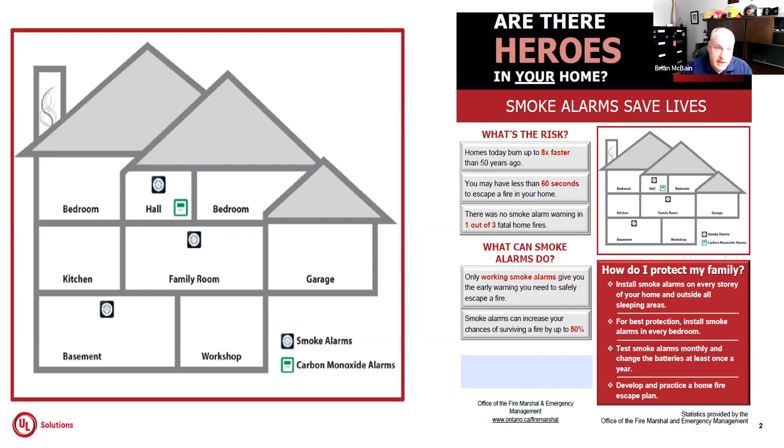So some information, for example, from the OFM, which is a great resource. NFPA also has some great resource material. This year I chose from OFM. So just to give a little bit about the risks, smoke alarms, great material to provide to the homeowner, a nice little visual of where your smoke alarms are supposed to be and your carbon monoxide alarms. Looking at that, this is the minimum code requirement, which is 1 per floor, and then outside the sleeping rooms. So I'll discuss a little bit about that, and then some of those building code requirements as of today.

So like I said, I'm going to talk about the building code. I'm going to try to go back into history to the first building code. I had researched some information. I don't have copies of the old codes, but from what I could find in archives and so forth, we'll discuss some of the fire code requirements. I'll look at some of the changes to the smoke alarm standard as technology changes, smoke alarm changes. I'm sure we've all noticed that in the smoke alarms. I'll speak a little bit about the ULC installation standards and the ULC maintenance standards, and then some other resources that are available to public educators and fire prevention officers.

I'm not really going to touch on carbon monoxide alarms. As UL, I can't speak to carbon monoxide alarms because they're tested to a CSA standard. So if you ever want information on the CO standard, we would have to contact CSA to provide a presentation on that. So like I said, I'm just going to touch on smoke alarms.

Okay. So we should all have access to the chat. What I would like to see in the chat is: if I built a brand new house today and I pulled a permit, tell me where I would have to install smoke alarms. So just take 30 seconds, put into the chat where all my smoke alarms would have to go in the house, and then I'll start going through and explaining that. So hopefully the chat will start populating a little bit.

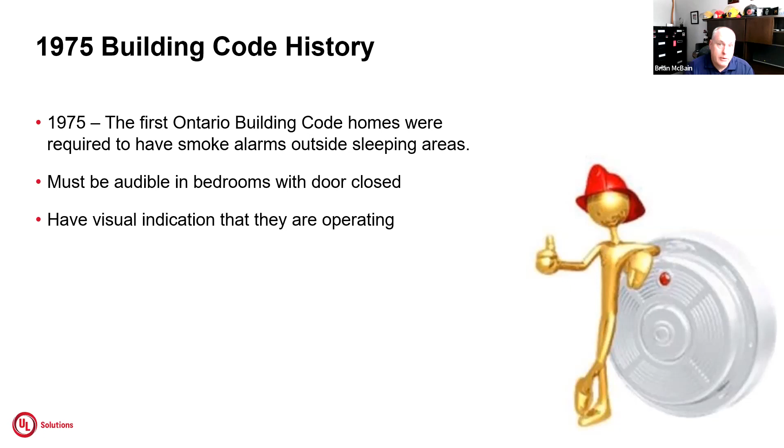Okay, so let's go back to the building code. Our first building code in Ontario was around 1975. At that time, homes had to have smoke alarms outside their sleeping area. The requirement was you had to hear it if the door was closed, and it had to have a visual indication that it was operating. So pretty base requirements. The visual indication would be the little red light on the alarm, or the green light saying that it's on, so it could be the red or the green light.

Then in 1979, they amended Part 3, not Part 9. They said you had to have a single station alarm installed in every dwelling unit of an apartment building, between the sleeping areas and the rest of the unit, on the ceiling or the wall; if on the wall, 6 to 12 inches down. And it had to have a permanent connection to an electrical circuit. They didn't touch Part 9 in 1979.

Then in 1983, they made changes to Part 3. All those previous requirements stayed, and they added more. They said the smoke alarm has to comply with the ULC standard. That was the first time they introduced the standard, a 1978 standard. When they made the changes in 79, the standard had just come out, maybe they were waiting for certified products. I don't know why they didn't go in 79, but it kicked in with the 83 building code.

If you had sleeping areas served by hallways, smoke alarms shall be installed in the hallways. Before, they weren't saying shall be. Installed on the ceiling in conformance with the acceptable instructions. Remember I was talking about the 6 to 12 inches; Part 3 said you had to follow the manufacturer's installation instructions. And in 83, interconnection was required, so if you had more than one, they had to be interconnected.

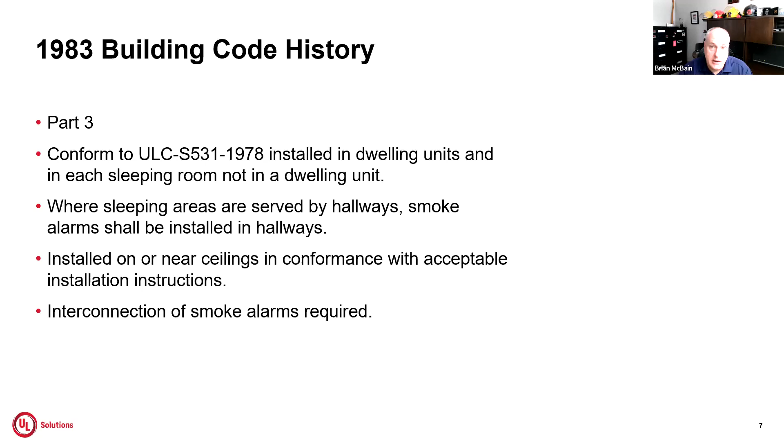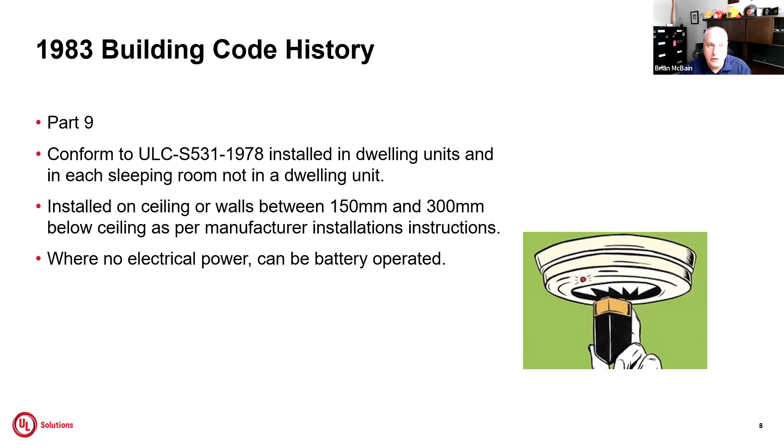In 83 also, part 9, they referred to the 531 standard, 1978, just like part 3 said. And then it said installed on ceilings or on the walls 150 millimeters to 300 millimeters. Well, remember before it was 6 to 12 inches. Now it's millimeters because metric came into effect, so the code had to change and add the metric requirements. So they stopped talking about inches and changed it to metric, and it had to be installed in accordance with the manufacturer's instructions. And in part 9, they permitted, if you didn't have electrical power, you could use battery operated.

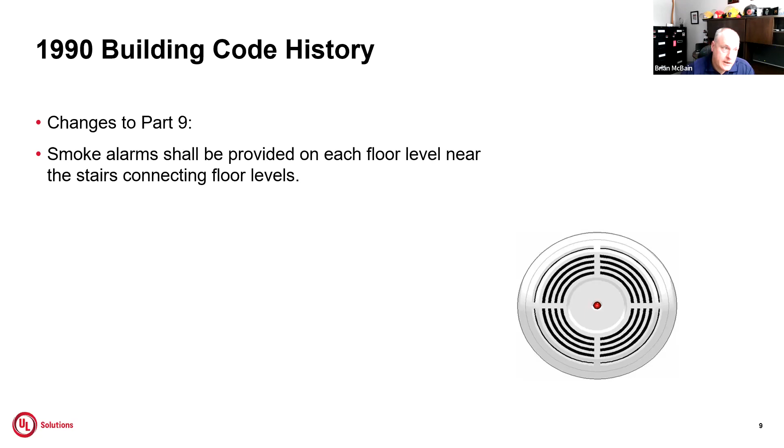In 1990, the building code made some additions to part 9: a smoke alarm shall be provided on each floor level near the stairs connecting the floor levels. So they said floor levels. Okay, so on every floor level, however the building code defined a floor level, is where you had to have a smoke alarm installed. Okay, so that was 1990.

So let's jump into the 1997 building code. 1997 kicks in and said, okay, for part 9, you need at least one smoke alarm on each floor level, including the basement. So I'm coming to the conclusion that between 1990 and 1997, maybe there was some confusion. Do I need them in the basement or not? Is the basement considered a floor level or not? So they clarified to say including basements. So if it's defined as a basement as per the building code, then you had to have one there also. That would be considered one of the levels.

Each bedroom is protected either inside or, if it's outside, within 5 meters of the bedroom door. The distance from any point on that floor level could not exceed 15 meters, okay? And a manually operated device is permitted within the circuitry of the smoke alarm to silence the signal. So the code introduced in 1997 the hush button feature. So if that came into the code, then the ULC standard had to get modified to include that requirement. So it just shows you sometimes the requirements are specific in the code, which then product standards have to get adjusted and updated and then tested to be in compliance with the code.

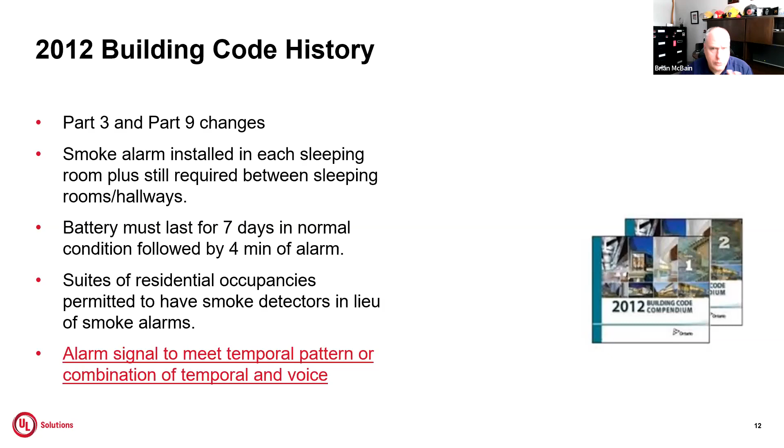You should not be able to buy any more of the beep, beep, beeps. There may be some that are still available, but at some point that'll be all done. And I think June 2024 will be the end of all that, and it'll be only temporal going forward, and with that battery backup. So don't quote me on that, but I think it's June 2024.

Also, with the 2012 building code in Ontario, in January of 2015, we had the part 3 and part 9, where in Ontario, smoke alarms have to have that visual signaling component. Not going to get into too many details on that. There were controversial items about it, because from my understanding, when the code first came out, there was no combination product. The code didn't say you had to have a combination unit, it just said you had to have a strobe.

So in the initial days of the implementation of the building code under permits, there could have been a smoke alarm wired over to a strobe light in every bedroom and in the house. And then eventually at some point, the combination units got onto the market, I don't know how many months later. And then you started seeing those combinations instead of a traditional smoke alarm tied over to a strobe. Okay, so that's the change, and now we basically see just the strobe light. Yes, they're quite a bit more expensive versus the traditional smoke alarm, but this is an Ontario-only requirement. There's no other province that has the strobe requirement as of yet.

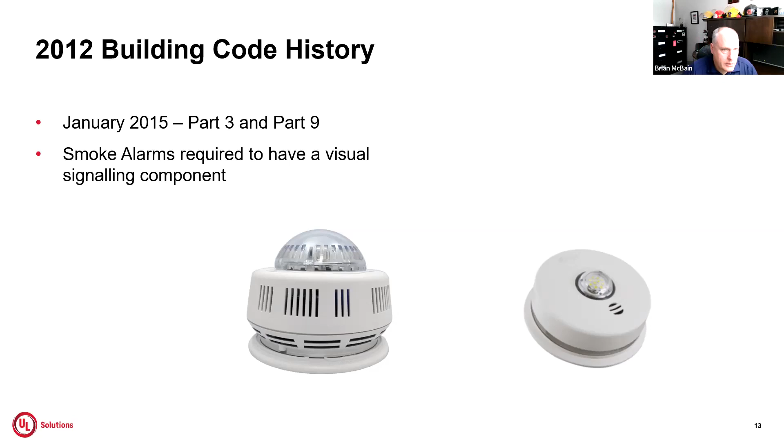I am a voting member on the National Fire Code, and there's been discussions at the national level to make it across Canada, but no decision or deliberations have been done as of yet for that. Okay, so a little history about the building codes. Why did I spend all this time explaining the building code?

Because as we go through the fire code, we will see that, I'm just summarizing here, if you're replacing a smoke alarm, it has to be in accordance with the building code of the day and meet the requirements. So if the building code of the day only required you to have one smoke alarm, which we know is not correct because the fire code says you need one on every level, then you would not have to go with a strobe light. You only have to meet the requirement of the day.

So we know we need one on every level. So, you know, there should be no house with just one smoke alarm. Now, what about the battery backup versus not the battery backup, right? So as we're looking at those requirements, you would have to put it back in as the day of the code, okay? So let's look at what the requirements of the fire code are.

So if we start with section 2.1 of the code, basically Part 2 does not apply to individual dwelling units except for sentences 2 and 3. So anything in the fire code does not apply to a dwelling unit, but let's go to what the exceptions are for sentence 2. I didn't pull out 3, I just pulled out 2.

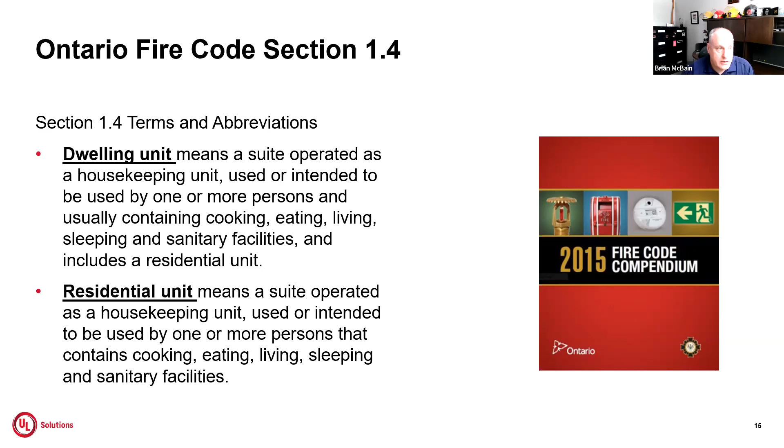So it's a suite that's operated as a housekeeping unit used or intended to be used by one or more persons that contains cooking. The other one, dwelling unit, says usually containing cooking. Residential unit says contains cooking, eating, living, sleeping, and sanitary. Okay, so just a couple of little definitions.

So let's get into section 2.13, because Part 2 said 2.13 applies to dwelling units. Okay, so let's look at the application for the installation of smoke alarms. So section 2.13 applies to suites of a residential occupancy and sleeping rooms not within a dwelling unit.

Okay, 2.13 does not apply to buildings that are subject to Part 9 and does not apply if smoke alarms have been installed in a dwelling unit or the sleeping room not within a dwelling unit in accordance with the building code as it read on or after April 6, 1998.

Remember when I was talking about the building code requirements in 1997, that's when it kicked in for a smoke alarm on every level or every story, okay? So that's why they're saying if you met those requirements of the building code since 1997, then this section would not apply, because this is for installation of smoke alarms, okay?

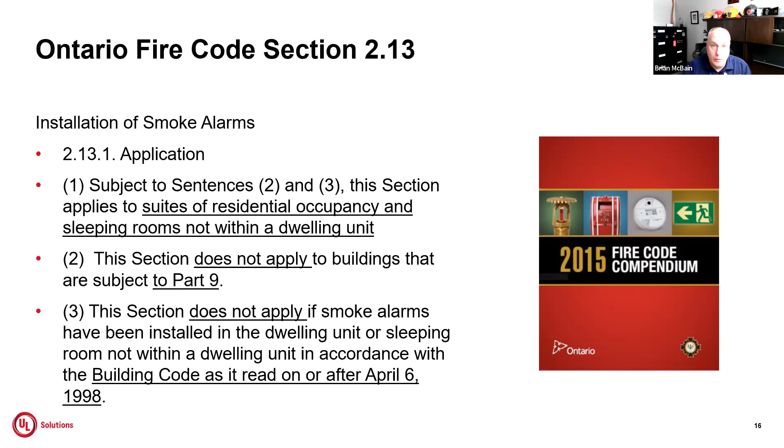So now what I'm going to do is start breaking up the requirement on where a smoke alarm shall be installed, okay? So a smoke alarm has to be installed, if the sleeping area in a dwelling unit is served by a hallway, in the hallway. So you have to install it in the hallway. So remember, this is the minimum code requirement.

Now let's look at B. So the next item under 2.13.2.1 says that the smoke alarm will be installed, if the sleeping area in a dwelling unit is not served by a hallway, between the sleeping area and the remainder of the dwelling unit. So I just found a random picture on the internet.

So if we have this type of dwelling unit, where could we install the smoke alarm? Because it has to be between the sleeping area and the remainder of the dwelling unit. There's no hallway or anything for this bedroom here. We can see the bedroom is right here. So you could potentially maybe put your smoke alarm here. I apologize, I'm looking at a different screen here.

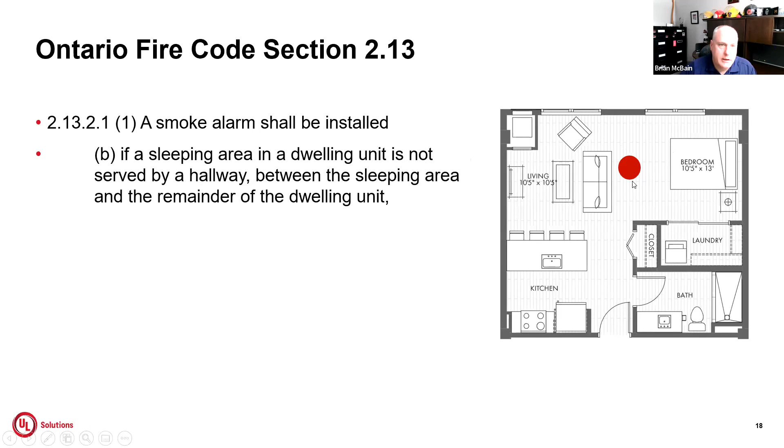All right. The smoke alarm has to be, if a sleeping room is not within a dwelling unit, in the sleeping room. So for those particular cases, if Part 9 doesn't apply for rooming, boarding, lodging for more than 4 or 10, whatever those numbers are, it's possible you might have sleeping rooms that are not in a dwelling unit. So you have to put them in the sleeping room.

So again, maybe not the best picture in the world, but just to give you an idea, this is not a dwelling unit, for example. It may be, but I'm saying it's not a dwelling unit. So then you would have to be putting the smoke alarms inside of each bedroom. So you would see them in this bedroom, this bedroom and this bedroom. So it's not a dwelling unit, so you need them inside the sleeping room.

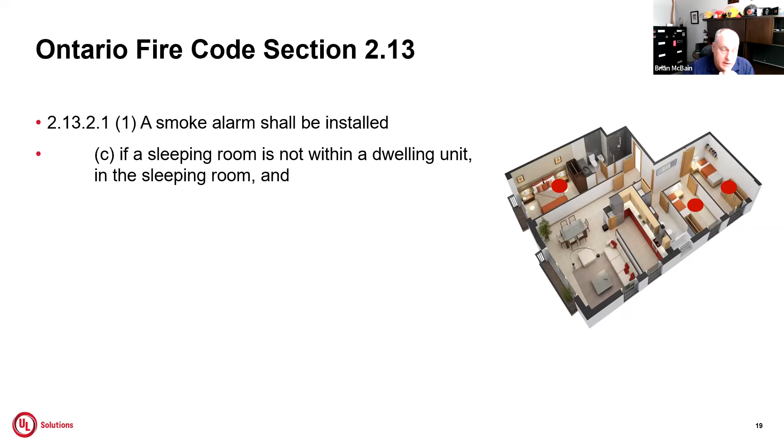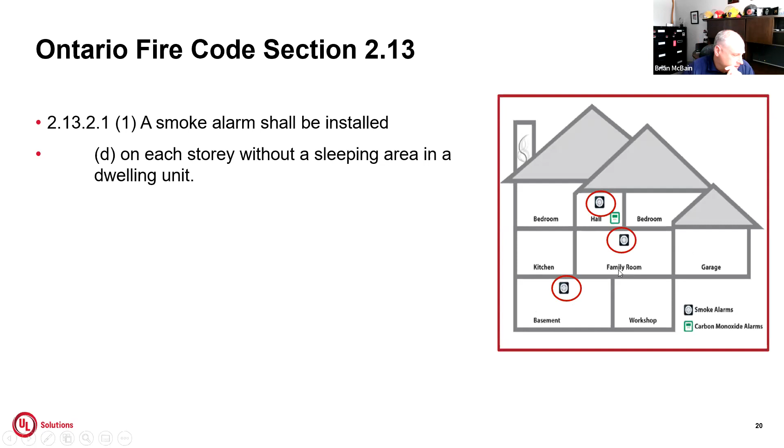The last requirement here is a smoke alarm shall be installed on each story without a sleeping area in a dwelling unit. So again, let's come back to this picture of the house. You need them on each story. Okay, so they're on every level, each story, you have a smoke alarm. So you can see here, the first floor doesn't have any sleeping rooms, so you need it, and there's no sleeping rooms in the basement, so you need the smoke alarms. All right.

Some other items in 2.13, a smoke alarm has to be permanently connected to an electric circuit with no disconnect switch between the overcurrent device and the smoke alarm. So there's no switch that can turn off the smoke alarm, it can only be turned off by a breaker. Or it can be battery operated. So the fire code has to give us those two options, because if there's buildings without power, a dwelling unit could be a cottage potentially, then you can go with battery operated.

Or if you had to add smoke alarms in a dwelling unit, you could go with battery operated. And then it says that a smoke alarm shall comply with ULC S531. So that's where you would see the ULC listed on the smoke alarm, or the cUL listed, or the ETL listed. CSA does not test smoke alarms, they test carbon monoxide alarms. So you wouldn't see a CSA logo by itself on a smoke alarm.

You may see a ULC and a CSA on the same device, or ETL and the CSA. Because of the carbon monoxide, if it was a combination, you could have both logos on it. Or a combination unit could have just one, and it was tested to both requirements. I'll get into that a little later.

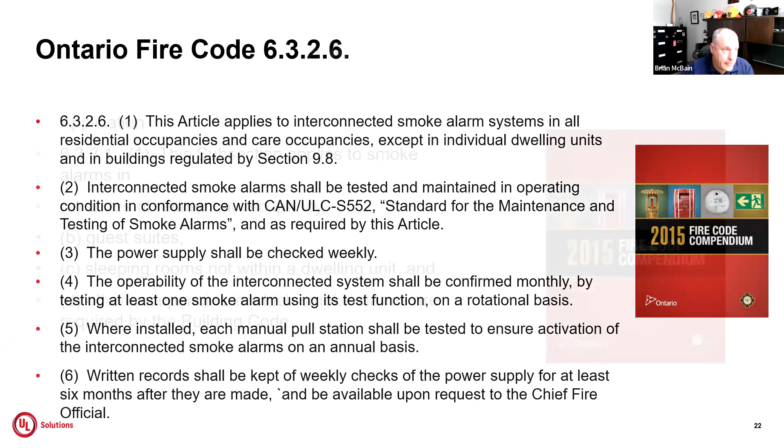Now we're going to jump into Part 6. So we were just going into more detail on 2.13, and we touched a little bit on 6.2 for interconnected smoke alarm systems. Now we will get into 6.3.3.1 or 6.3.3, which is smoke alarms. So obviously start with the application. So this is for residential occupancies, guest suites, sleeping rooms not within a dwelling unit, and any other occupancy in which smoke alarms are required by the building code. So that's the application for 6.3.

As we look at 6.3, numerous requirements, but I highlighted what those requirements are. Okay, so 6.3.2 is that the landlord is considered the owner for a rental suite. So we know at the beginning of the building code, I think in Division A 1.4 or something, it says that the owner is responsible for the code, but for these particular requirements for a rental suite, it's only the landlord that is considered the owner for applying the requirements. Okay, so when it comes to the owner shall be responsible, it will be the landlord. Okay.

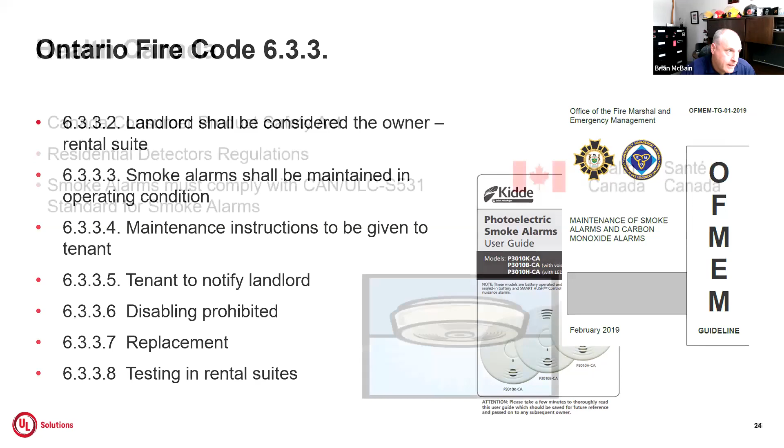Okay, so I just finished speaking about the building code and fire code. Smoke alarms have to be compliant with 531, installed in accordance with 553, and maintained in accordance with 552, and so forth. So the building code and fire code say smoke alarms have to conform to 531. If we look at the electrical code, it says the same thing, that smoke alarms have to comply with 531.

The smoke alarms require certification, because anything electrical that's 120 has to be certified. Whereas for the building codes and fire codes, we don't say it has to be certified, it just has to conform to the standard. But we look for the certification mark, because how else are we supposed to know that that smoke alarm is compliant with 531? Would we accept a letter from a manufacturer saying there's no ULC, no ETL, no CSA, no nothing, but I'll write it on a piece of paper or an email that it complies with 531?

So 531 is, I think, a 200-page document for testing of smoke alarms and the construction of smoke alarms. We as inspectors typically would prefer to see the listed mark on it. But the electrical code requires the smoke alarm to be listed, so that kind of trumps it all. However, the electrical code does not speak about a 9-volt battery, only the hardwired ones.

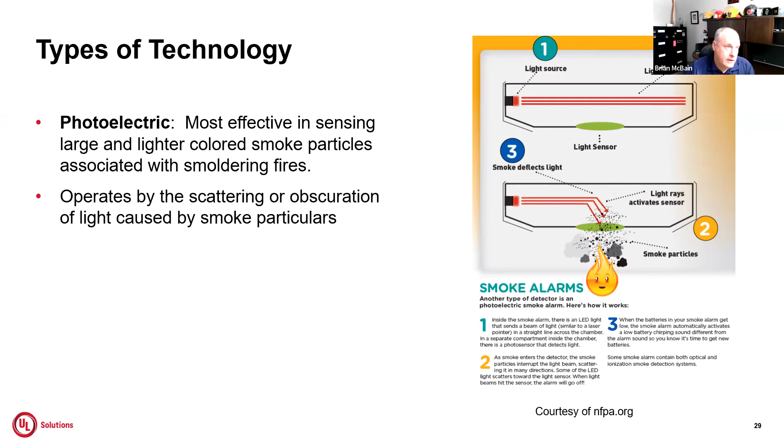The standard also speaks about a multi-criteria smoke alarm. As technology is moving forward, the standards have changed. Smoke alarms are getting intelligent, and they're starting to put the technology and the sensors inside these smoke alarms to help reduce nuisance alarms. So basically this multi-criteria alarm has the smoke sensor plus one or more additional sensors. It could be a heat sensor, could be radiant energy, could be fire gases or smoke that operate together.

So what happens is each sensor is set at a level to measure the presence of the product that it's monitoring, and it gets the signal. There's a mathematical equation going on in that technology, and it's determining the amount of smoke within the device. And if those sensors together have come up with the criteria that there's enough smoke, then it sends the alarm signal. So it would not generate an alarm if there was not enough smoke. This technology is being used now to help reduce false alarms. That's called multi-criteria technology, and it would be written on the label on the back if it was a multi-criteria smoke alarm.

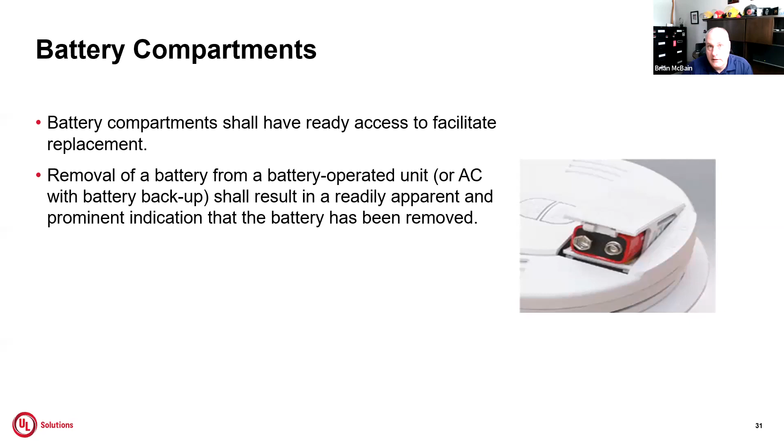Some things to understand about the markings. On the back of the smoke alarm, it'll tell you that it's certified and it has all the instructions in English and French. And it also speaks to the date of manufacture. So on that back side of that device, the date of manufacture has to be there.

However, in the 2002 edition of the standard, the committee said that you have to have an expiry date on the outside of the smoke alarm. So it could say replace by whatever date. So you have to readily see from the outside when the smoke alarm has to be replaced. If you do not have that replace by on the outside, either it fell off, which it shouldn't, or... as of 2004 was our effective date.

So remember I said once a standard is published, the certification companies have to review all the files of all the manufacturers and decide on what's the drop date that everything has to comply with. So for ULC, we said, I think it was June of 2004, that all smoke alarms will have to have this replace by on the outside.

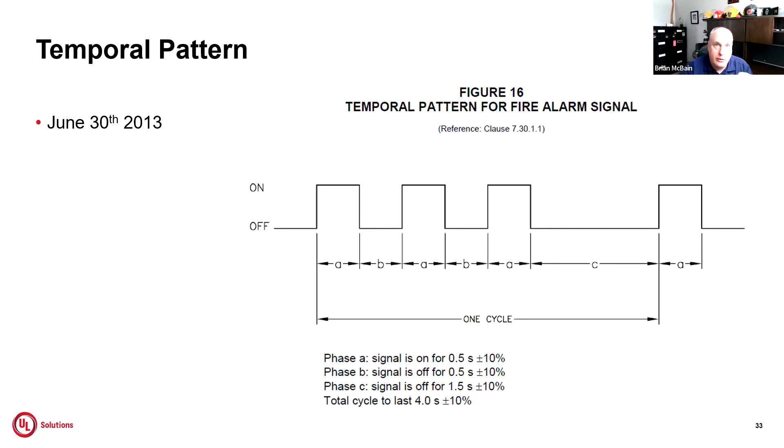I briefly talked about an end of life signal. The 2014 edition introduced this end of life signal into the standard. I just pulled a few things out of the standard: the smoke alarm shall indicate the end of life based on the manufacturer's lifetime, not to exceed 10 years. So the manufacturer could make it 9 years, 8 years, 7 years, hence the reason why the fire code says as per the manufacturer. So it's important to verify through the manufacturer's installation manual what those replacement dates are.

The end of life signal shall not be able to reset after 30 days. So you can keep pressing reset, but it cannot go past 30 days. I took a snippet from Kidde's website, for example. How do I determine if my end of life has been reached? They say if the alarm emits a chirp every 30 seconds, it's either the end of life or a sensor error. If the alarm emits a chirp every 60 seconds, it indicates the battery power is not sufficient to power the unit. An end of life or sensor error will not respond to a battery change.

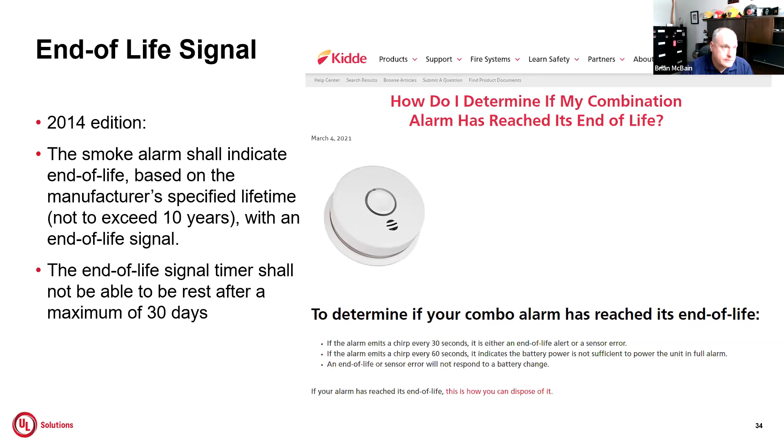All right. 553, this is the installation of smoke alarms. So the Ontario Fire Code is referencing the 2002 edition. Our current edition is the 2014 edition. The Ontario Building Code as of today refers to the 2014 edition for the installation of smoke alarms.

Okay. Some of the things that it requires versus the old one is a smoke alarm installation and verification report has to be kept on site. If you're doing an interconnected smoke alarm system, you need to do a verification report. And I'm talking about an interconnected smoke alarm system as defined by the code, not an interconnected one in your house. You don't need to do a verification report there, but for those occupancies that need that interconnection as per the fire code, you do. And again, always refer to the manufacturer's installation instructions.

Within that 553 standard, the 2014 edition, there's actually a report in the back in Appendix C that you can use, very similar to the 536 fire alarm inspection report, the 561 annual report for monitoring systems, 537 verification. So there's a sample document that the installers can use for that interconnected alarm system for those occupancies. Okay. It has to be kept with the building owner.

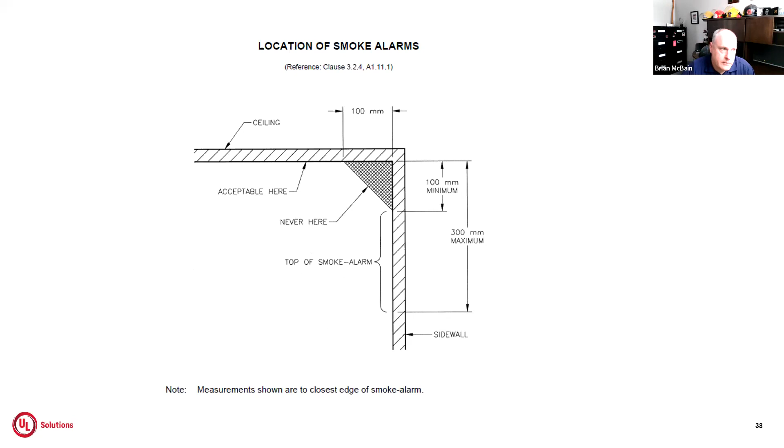If you're looking at sloped ceilings, smoke alarms on a ceiling with a slope greater than 1 in 8 will be located on the ceiling at the high side of the room, but no closer than 900 millimeters to the peak of the ceiling, or on the wall with the top of the smoke alarm not more than 300 millimeters below that dead space, right? So we're always looking at that dead space. For this particular case, it's that triangle with that 100 millimeters at 90 degrees to the wall. So just ensure that they're not installed in that dead airspace.

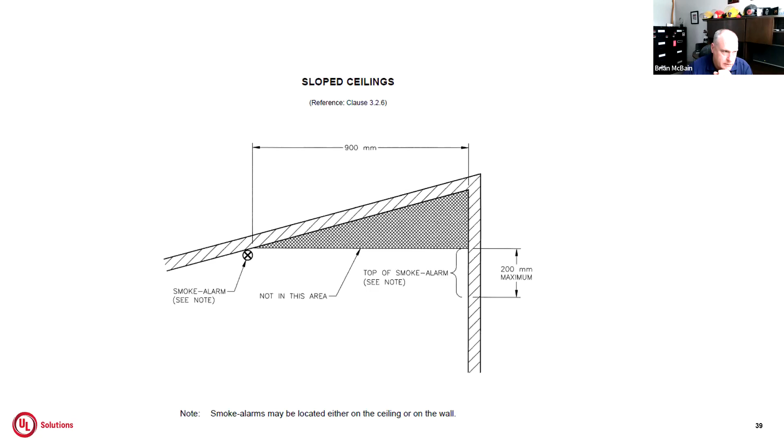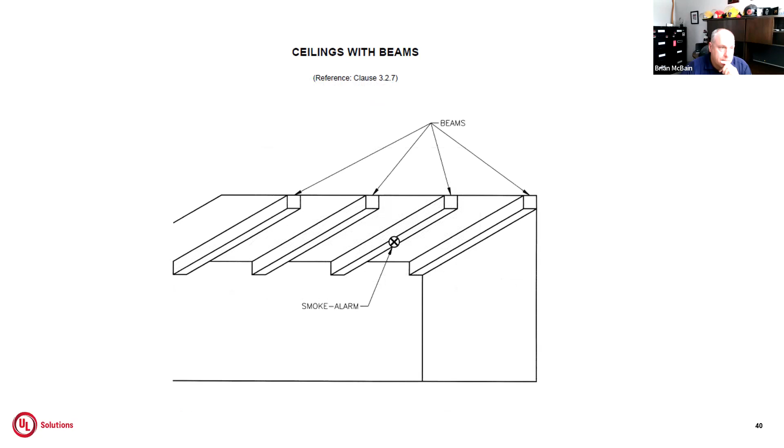If you have ceilings with exposed joists or beams, they'd be mounted on the bottom of the joist or the beam, okay? If you have smoke alarms with air conditioning or forced air ventilation, smoke alarms shall not be mounted near the supply air duct, keeping at least 450 millimeters away from the supply air outlets. And the airflow at any location shall be towards the return or the exhaust outlet. So always ensure that 450 millimeters away from those locations.

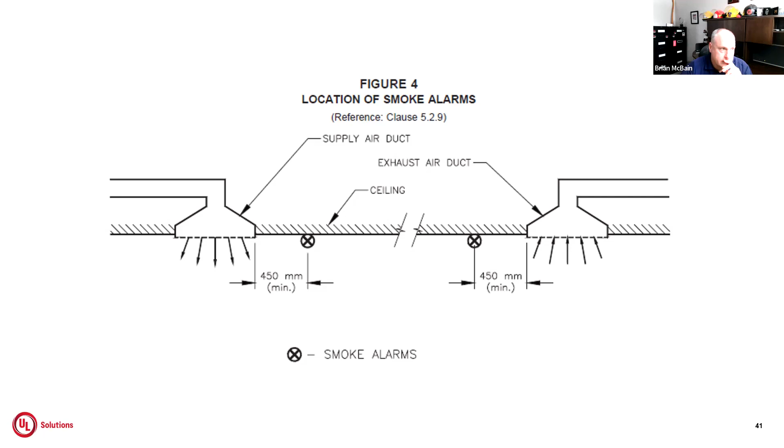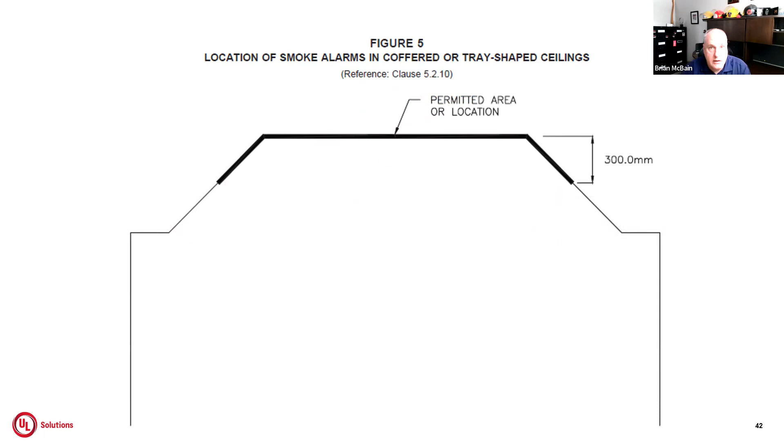If we ever come across coffered ceilings, or that tray type of ceiling, it would be mounted on the highest part of the ceiling or on the sloped section of the ceiling within 300 millimeters vertically down from that highest point. Okay, so that would be the permitted location to put the smoke alarms.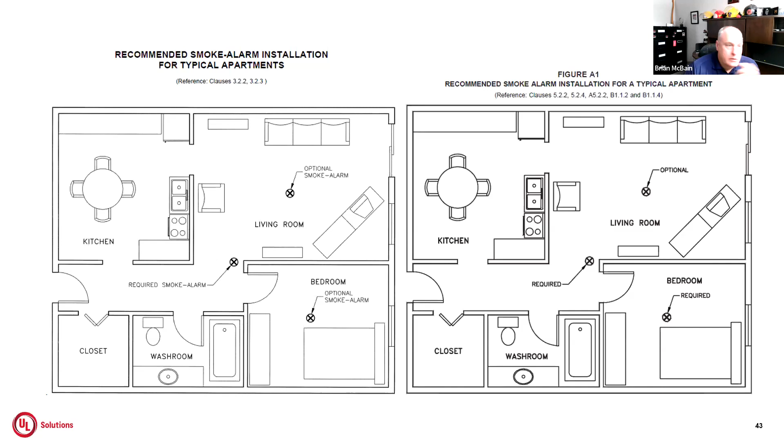So looking at these two pictures, the right side or the left, I just want you to say right or left. Which one of these pictures applies to a smoke alarm that has been installed in accordance with the 2012 building code? The right or the left? So in the chat, put right or left, and which picture indicates that the smoke alarms were installed in accordance with the 2012 Ontario Building Code. So I just see a lot of people are saying right.

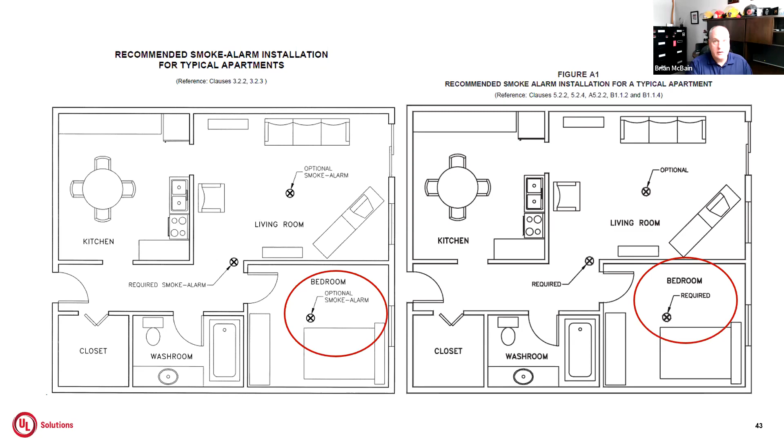So the key here, when you're looking at these pictures, bedroom was optional in the 02 edition of the 553 standard, but in the 14 edition, it was required in the bedroom because the 2010 National Building Code, 2012 Ontario Building Code requires them in the bedroom. So that's the differences when you're looking at the two standards side by side, is where it's required versus optional. So excellent, good job.

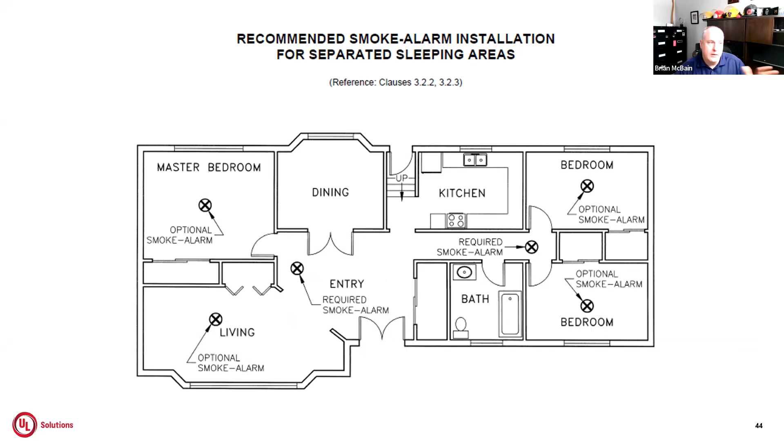Separated from sleeping areas. So again, this particular picture is from the 02 edition of the standard because it's optional in the bedroom, okay? But it would be required here in the hallway and also required near the master bedroom and the living room because the sleeping rooms are at opposite ends and they would have to be within 15 meters of each other. All right.

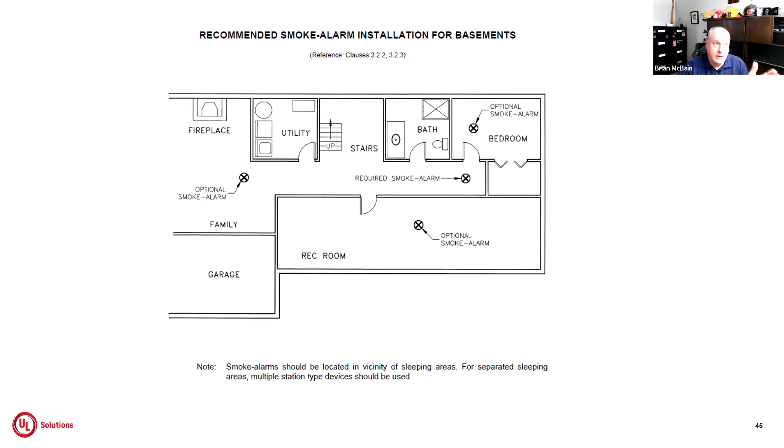If it gets revised, then the standard committee made changes to the document and it becomes revision 1, revision 2, and so forth. Or it could then become a new edition at some point. But if you see an R with a date, it's just reaffirmed, no technical changes. It's still the same standard. Again, you always hear me say refer to the manufacturer's instructions because the manufacturer's instructions are approved by ULC, okay? Or Intertek or CSA, whoever.

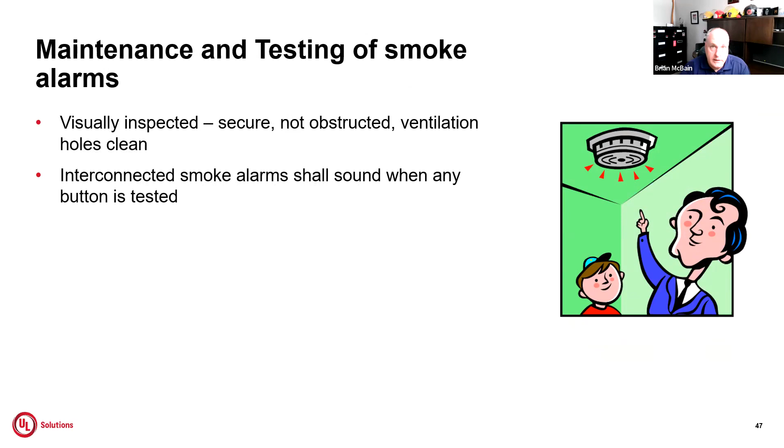Maintenance and testing of smoke alarms. So we have to visually inspect to make sure they're secured, they're not obstructed, those ventilation holes are cleaned. Interconnected smoke alarms have to sound everywhere when you press the button. Okay, so those are some of the maintenance that we do. Maintenance and annual testing. Exterior smoke alarms shall be vacuumed. It actually says that in the standard, okay?

After your vacuuming, smoke alarms shall be tested using either smoke or simulated smoke. Batteries are inspected to verify the batteries are securely connected to the battery clips. The terminals are not corroded, they're not leaking. For those batteries that are replaceable. Remember now, some smoke alarms have a 10-year life and you can't touch the battery. The battery is integral to it and you can't touch it. So if it's a replaceable battery, that's what you're looking at. You've got to make sure it's the correct battery type.

If you go into the manufacturer's approved installation instructions, or sometimes it's even written on the back of the device, you have to use Energizer model 123 or Duracell 56, because that's how it was tested, with those specific batteries. Rechargeable batteries are not recommended to be used unless they've specifically been tested by the manufacturer, and they'll tell you which rechargeable to be used.

When do you replace a smoke alarm? So obviously, if you test it and it doesn't work, then you should be replacing it. If the exterior of the smoke alarm is damaged, or if it was painted, if there are frequent alarms going off for no apparent reason, and it's not a result of any type of cooking or steam, then you should probably replace it. If the battery terminals are corroded, if they have a replaceable battery, or if it's covered in smoke stains, grease, dirt accumulation. Okay, so if any of those apply, it's recommended that they replace the smoke alarm.

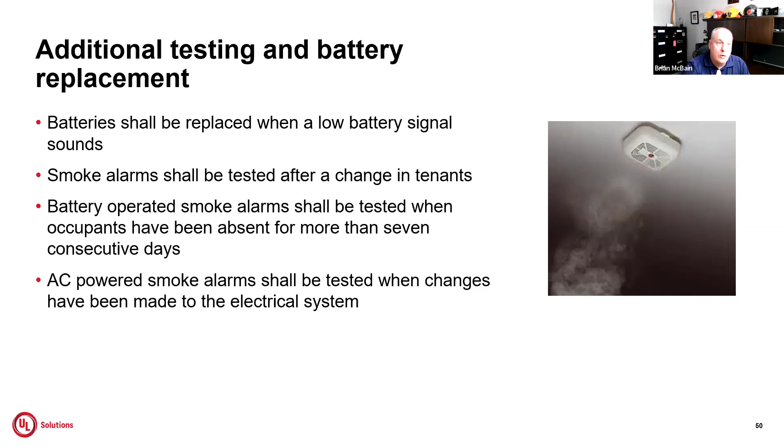Okay, so that is the 552 standard for the installation or the maintenance of smoke alarms. So it is not in the code for like dwelling units. They would always follow the manufacturer's instructions, but there's parts potentially in Part 9 that say you have to install them in accordance with S552. So wherever S552 applies, those are the requirements. But it's also good practice for the landlords and homeowners, what they should know, because all of this is also in the manufacturer's instructions.

Disposal of smoke alarms. So the standard basically speaks about smoke alarms for households with 185 kBq or 5 microcuries of Americium 241. So Americium 241 is inside the ionization smoke alarms. A typical smoke alarm has 33.3, so quite a bit less than the 185 or the 0.9 µCi. So you can dispose of them in your regular household garbage.

All right, this is a smoke alarm that you could potentially see in an occupancy. If you take it off and look at it, you're going to have all this writing on the back. So this is all writing that's required by the standard. In Canada, we have 2 official languages. Therefore, a smoke alarm certified for Canada has to have English and French on it. Again, it tells you about the chirping and the LED lights and all that kind of stuff.

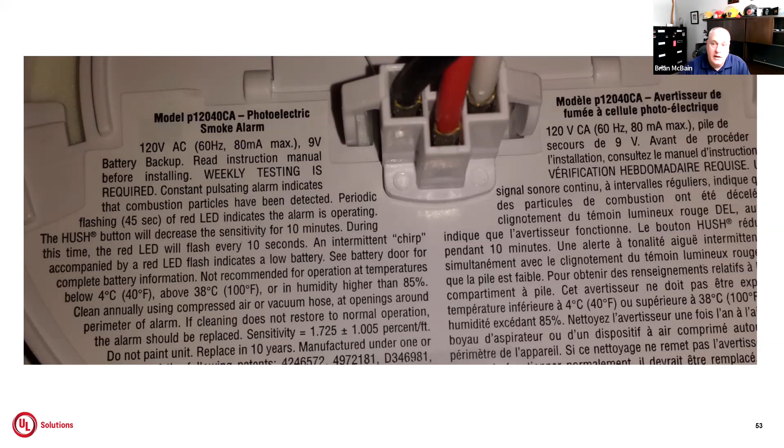If a homeowner calls you and says, I bought a new smoke detector, I'm trying to replace it, and that pigtail is not going into it, it's because it's not compatible. It's either not the same manufacturer, or it's a different detector the manufacturer has made that does not fit that pigtail. So that pigtail would have to be replaced in order for it to be connected, okay?

For this particular one, you'll see this is the battery compartment on the back of the smoke alarm. So it has all the warnings about the device and about the battery. And if you took that out, you wouldn't be able to close that compartment either. This would be the certification of the smoke alarm. It'll say that it's listed. We have ULC listed, or homologué.

Sometimes you'll see the cUL listed, which is acceptable in Canada. If there was no C at the UL symbol at the 10 o'clock position, that means it was only certified to the US requirement and not the Canadian, and it would not be acceptable in Canada. So when you see UL listed, you have that little C outside the circle at the 10 o'clock position. This particular smoke alarm is certified for both single or multiple station. So remember, we had discussed earlier the difference between single and multiple.

So for the next few minutes, I think I have 15 minutes left, I'm going to talk quickly about Product IQ. Product IQ is the database for UL and ULC certified products. Any product that is certified and has our mark on it is in this database.